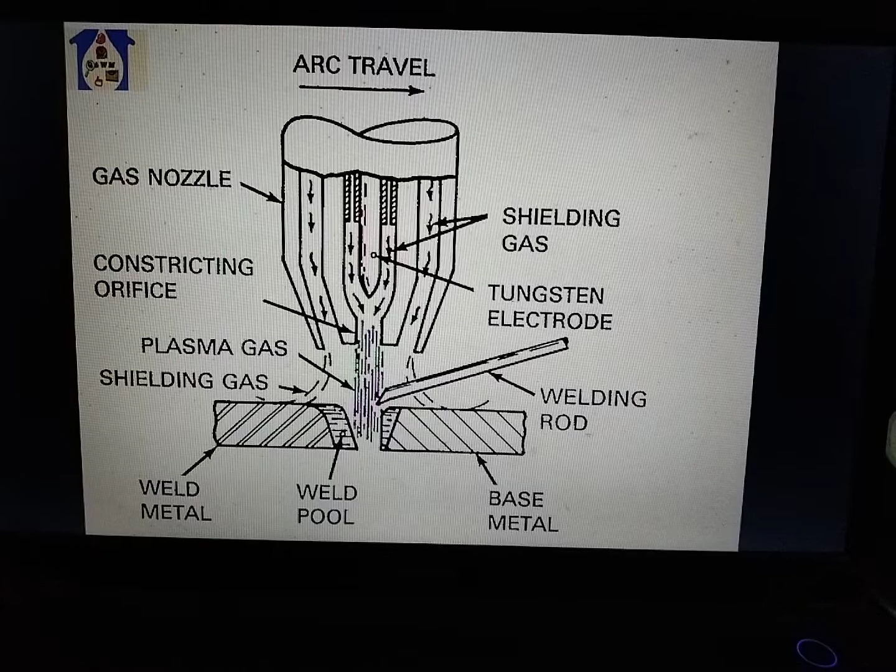Plasma welding. This is the plasma welding configuration. The plasma arc welding (PAW) process provides a very stable heat source for welding most metals from 0.001 to 0.25 inch, 0.02 to 6 mm.

This process has advantages over other open arc welding processes such as SMAW, GMAW and GTAW because it has greater energy concentration, improved arc stability, higher heat content and higher welding speed. As a result, PAW has greater penetration capability than SMAW, GMAW and GTAW.

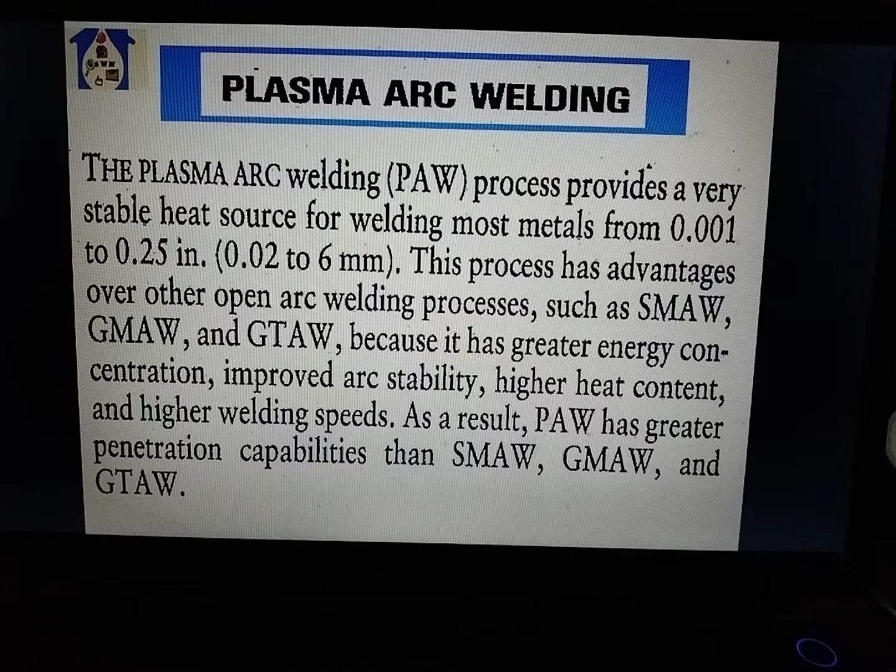The basic elements of the plasma arc torch illustrated in figure 1.7 are the tungsten electrode and the orifice. A small flow of argon is passed through the orifice to form the arc plasma. Shielding of the arc and weld zone is provided by gas flowing through an encircling outer nozzle assembly. The shielding gas can be argon, helium, or a mixture of argon with either hydrogen or helium.

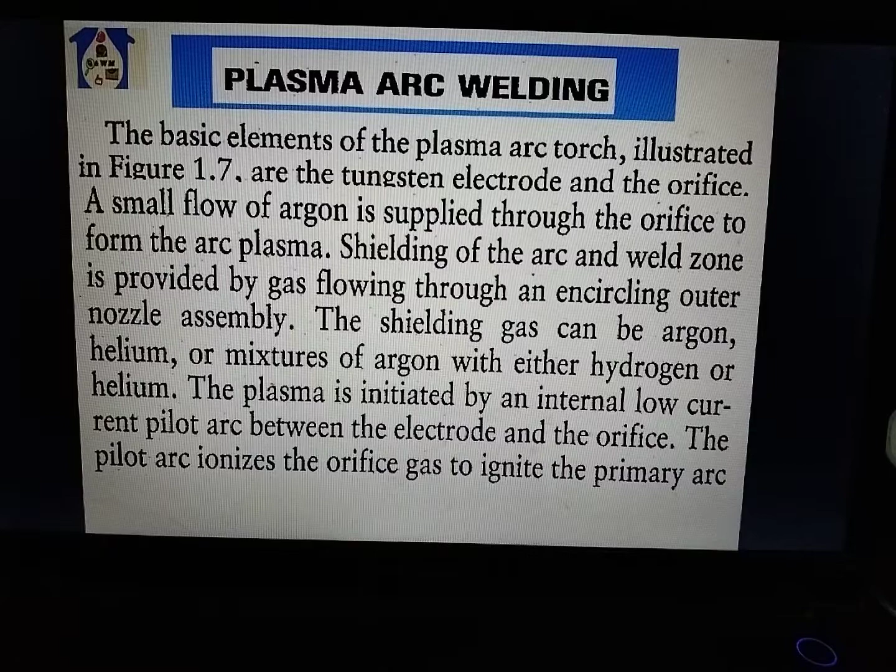The plasma is initiated by an internal low current pilot arc between the electrode and the orifice. The pilot arc ionizes the orifice gas to ignite the primary arc between the electrode and the base metal. The arc plasma is constricted in size by the orifice around the electrode and is called a transferred arc. If filler metal is used, it is fed into the arc as in the GTAW process.

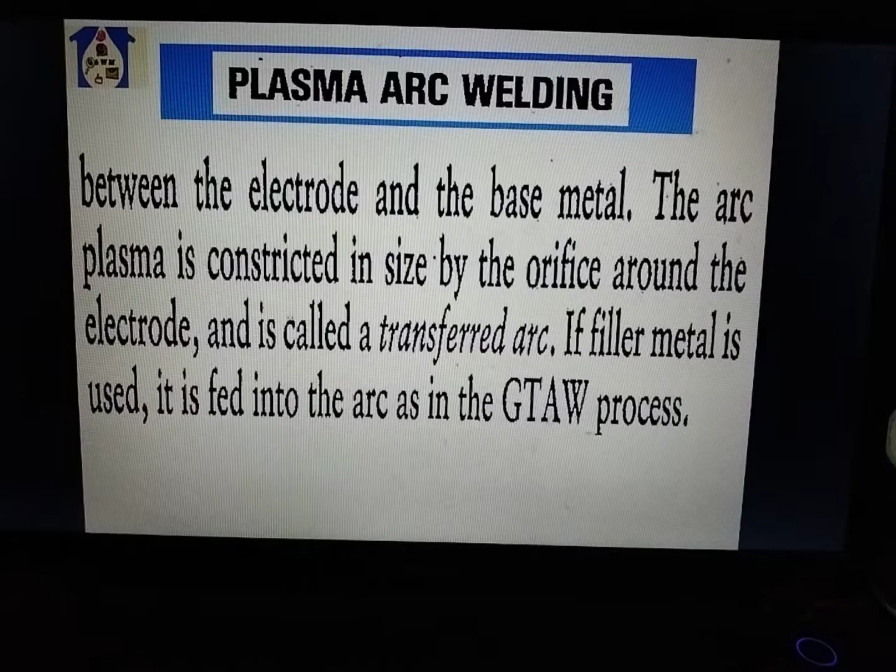Two welding techniques are possible with the PAW process: melt-in and keyhole. The melt-in technique is normally used when welding thin sections in the range of 0.001 to 0.062 inch, 0.025 to 1.5 mm. Narrower welds can be obtained with PAW than GTAW because of the constricted arc. Manual welding of very fine sections of 0.01 inch, 0.2 mm and under is very difficult with the GTAW process but practical with low power PAW.

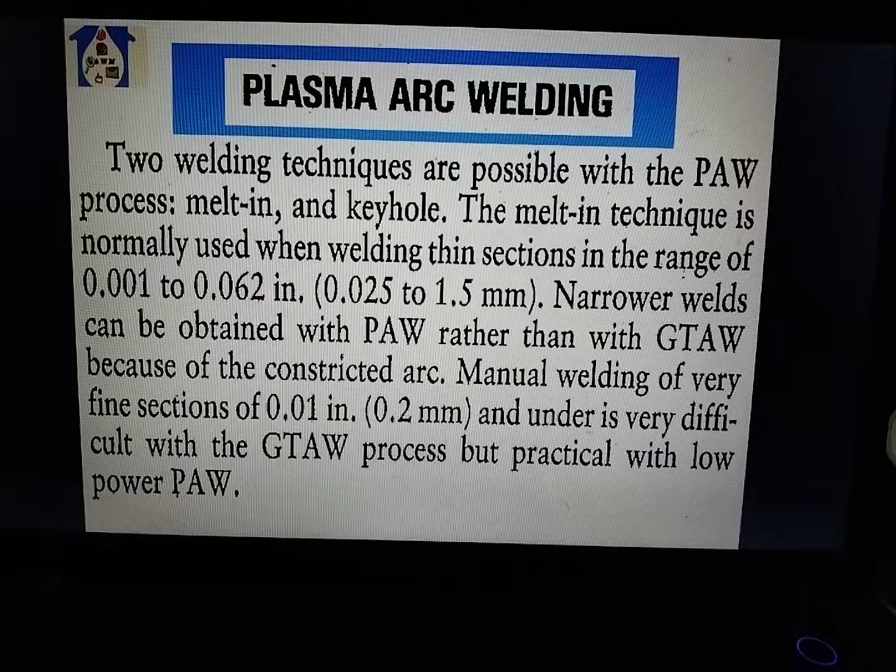High current manual PAW can be done in the melt-in mode in 1/32 to 1/8 inch, 0.8 to 3 mm. Thick butt joints or lap joints can be used in joining most materials. Titanium and other reactive metals can be joined using helium as a shielding gas. Generally, the operating current is 100 amperes or less.

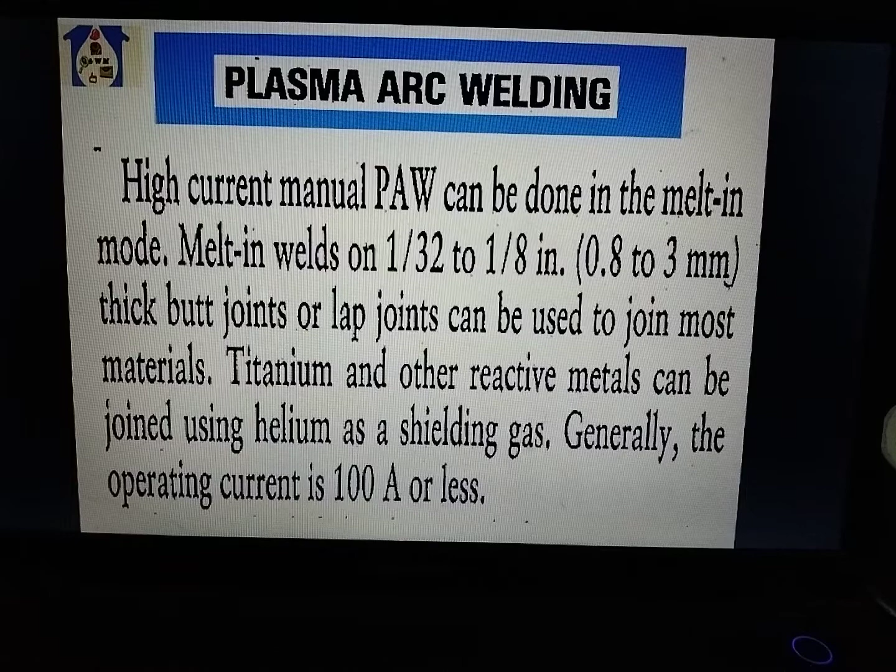The term keyhole has been applied to a penetrating hole at the leading edge of the molten weld pool. The weld metal flows around and solidifies behind the hole to form the weld bead. Keyhole welds are complete joint penetration welds with high depth-to-width ratios, resulting in low distortion. Operation with the keyhole can be done on most metals in the thickness range of 3/32 to 3/8 inch, 2.5 to 10 mm, and up to 3/4 inch, 19 mm, in some titanium and aluminum alloys. This is one of the chief differences between the PAW and GTAW processes, with operating current up to 300 amperes.

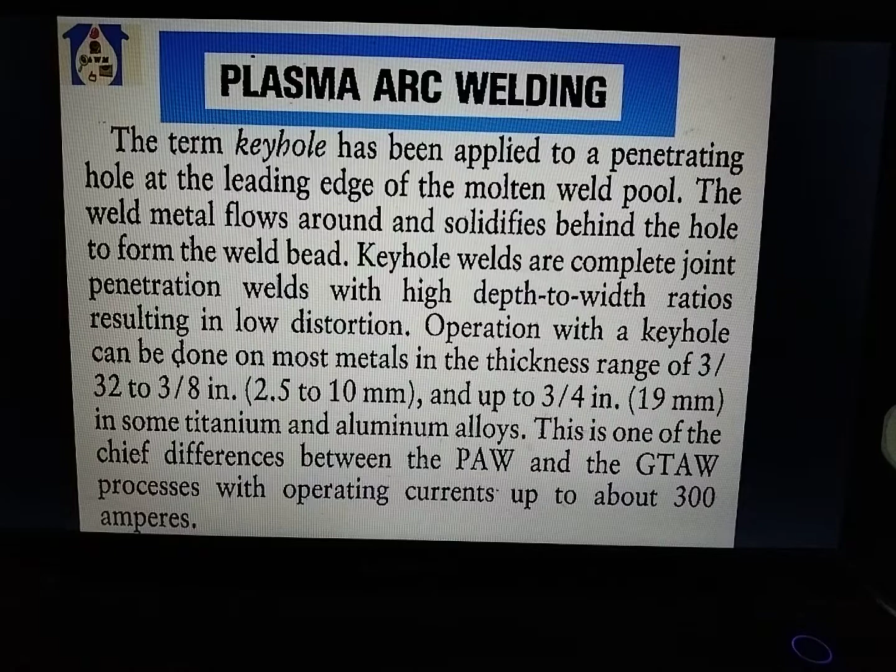The PAW process requires the following equipment: control console, power source, welding torch, cooling system, work clamp, and lead assembly. Shielding gas, orifice gas, inert gas, regulator, and flowmeter. The operation of the equipment may be manual or mechanized. Typical costs for PAW equipment range from $3,500 to $6,000.

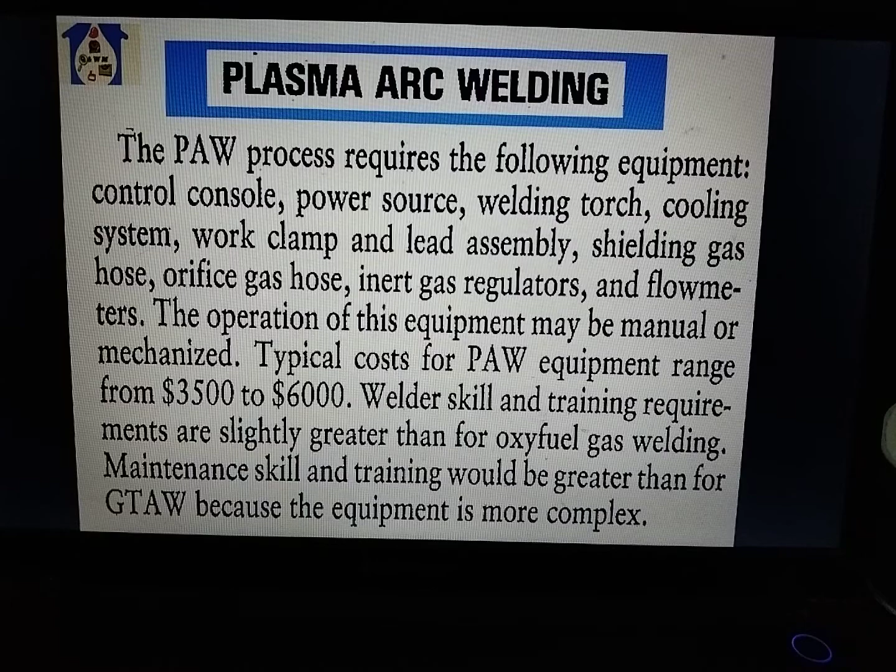Welder skill and training requirements are slightly greater than for oxyfuel gas welding. Maintenance skill and training would be greater than for GTAW because the equipment is more complex. Out of position welding is possible, and uniform penetration can be obtained by PAW. Inert gas backing of the weld is normally used to minimize discontinuities at the root. Square groove joints with little or no filler metal are common, used up to 1/4 inch, 6 mm, thick material. Welding speed ranges between 5 mm